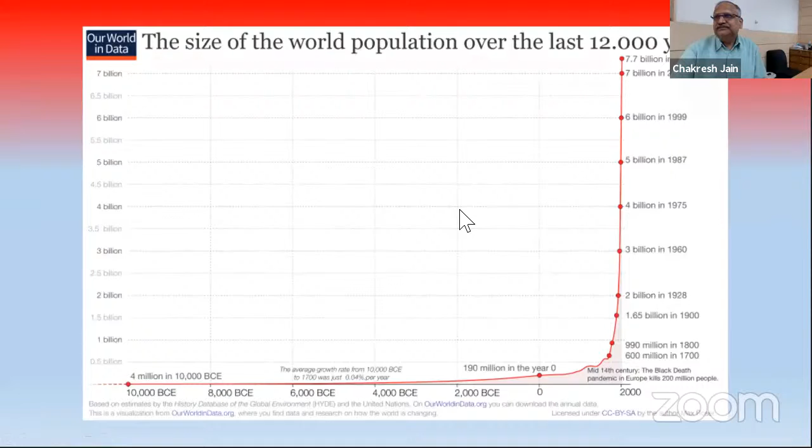Now, if we get a little closer, let's say the last 50 years, India and China are the two most populous countries. In the last 50 years, we have more than doubled our population. So as a country, our population has been growing very fast.

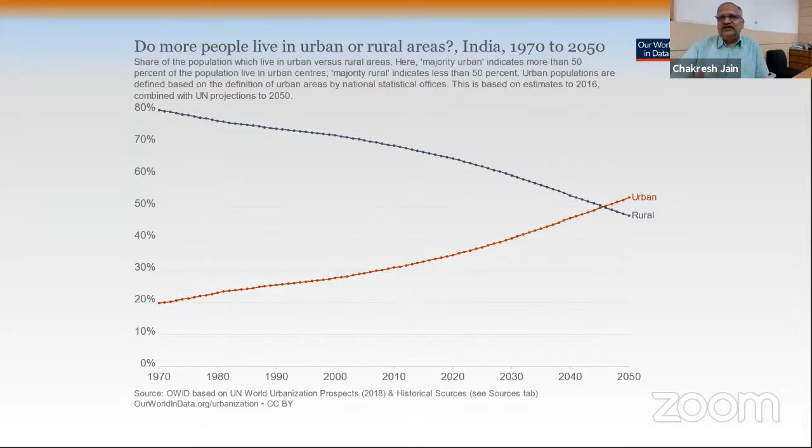But not only that, another big problem we're seeing is the urban population. In the last 50 years, the entire population growth is not happening uniformly across the country, but is moving to urban areas. What does that mean? It means we need to provide a roof over each and every head.

These numbers may not mean much to us, but if you start translating that into the construction industry, today we are supposed to construct almost 800 housing buildings - I'm not talking about units, 800 housing buildings per day. That's the kind of pressure we have today.

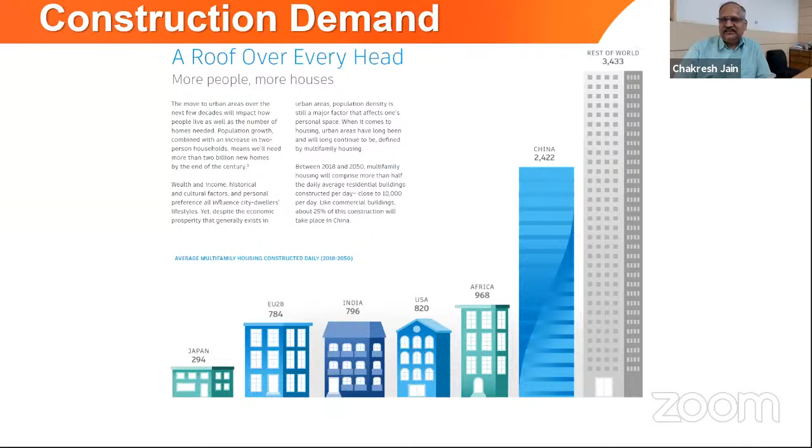On one hand, we have a growing population where we need to provide accommodation for them. But on the other hand, we need to have a very sustainable earth for ourselves. This throws a lot of challenges to us. The first challenge, which is well-known, is that in the last 50-60 years, the productivity in our construction industry hasn't gone up. So that's one big challenge.

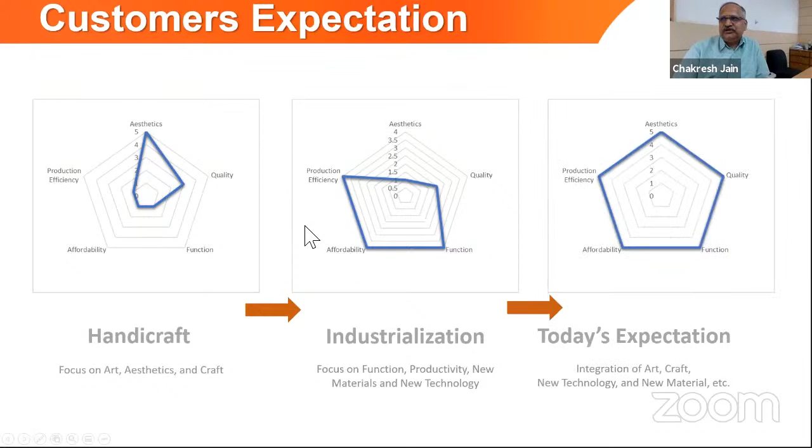The second challenge is today our customers also expect the best of everything. Before the industrial revolution, we used to have very good aesthetics and design. With industrialization, we could also produce things which were very functional, affordable, and produce them en masse. But today our customers are expecting everything from us, and with both of these things put together is the current challenge we have.

I won't talk about the solution, but we have a panel of experts participating from across the country, some of the best people available in the country. So let's hear from them. I'll pass on my baton to them, so they can talk about how we can have a balance between sustainability and what is required to provide a roof over every head in our country. So over to you, Farhad.

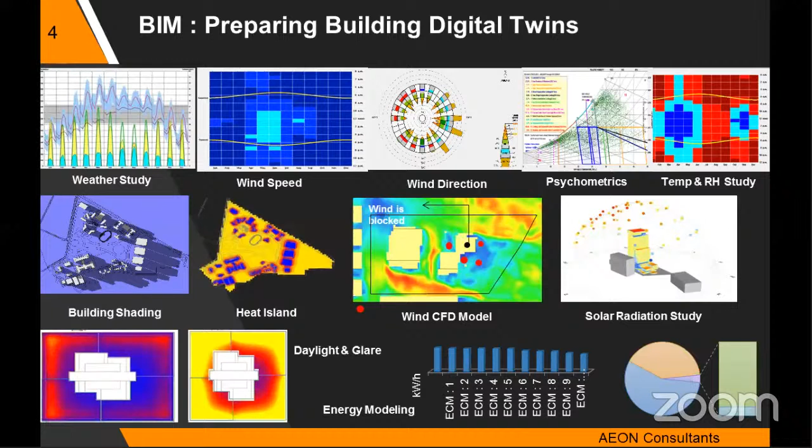It could be an existing building, it could be a new building, and that's where I look at it as one of the applications of building information modeling as it goes on. So I'm going to be talking about the aspects of it in building design today, how it is being deployed. And I'm going to present various case studies to you, short ones, since the time is only 20 minutes.

We got eminent panelists and speakers ahead, so I'm just going to show you small case studies. I normally give this presentation over 1 hour, so I have condensed it to cover the essence of it.

Now, we all know that the world is moving towards net zero emissions and net zero buildings. This is the future. Whether we achieve that in 2030 or 2035, it's a matter of time. But the building codes across the world, including in India, are moving towards net zero performance, be it net zero energy, net zero water, net zero waste, or net zero carbon. So it's a shift which has started taking place.

And as we are moving towards that, it is important that we optimize the building design before we deploy the renewables. It would be completely an incorrect way to go, where we look at a conventional building and use the brute power of renewables to make it a net zero energy building. That will just be the wrong way to go. And that's where the importance of taking care of passive elements of building design, active measures, integrating the two, comes into the picture.

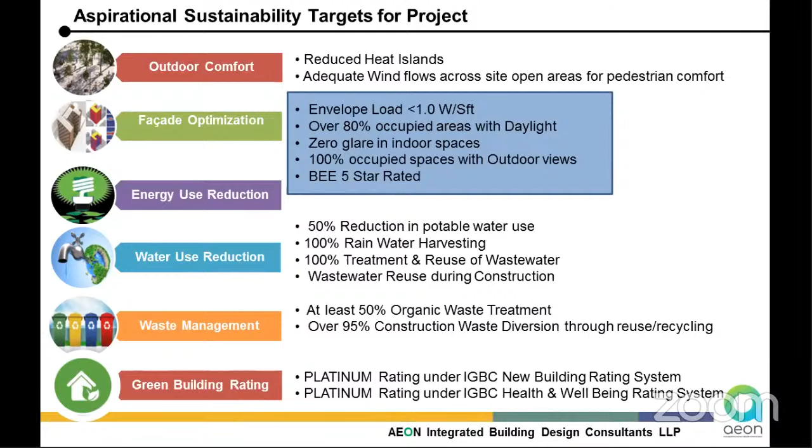Now, how do you quantify such a thing? They of course wanted 100% daylit space, as far as possible, more than 80% daylit. They said zero glare, and it is only the envelope performance that they're talking of. And this is where the tools that are available to us, to the engineers, to the designers, become important.

Like a simple case, we had these 3 buildings on this project where the glare component was very high. Two of the buildings, we had the glare still under control, but in building C, as you see there, the glare component was very, very high. Now, how do you take care of it?

Obviously, we have been talking about putting shading devices, various glass selections, and all that is possible to be done before you physically construct the building. I'm going to show you more examples in these areas where these tools are being deployed at this point of time. Now, here we are selecting the right glass typology.

It could be a darker glass, a low VLT glass, to a medium VLT glass, to a high VLT glass. How does the glare coming inside vary? How does the daylight performance change? What is it that we are looking for in terms of performance? All that is something which can easily be determined.

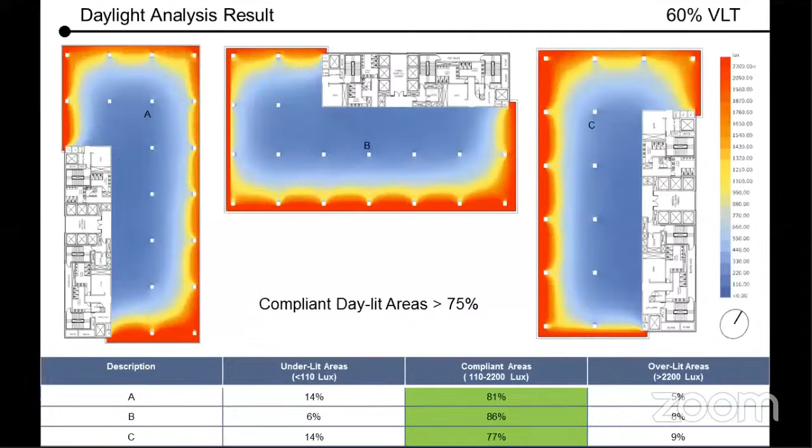Going forward, there's a double skin facade being talked about. There's something called parametric modeling, which is now being practiced and adopted in India, using shading devices, active shading devices, passive shading devices on the building facade. Using these tools, one is able to find out the right kind of shading device which balances between the daylight, glare, and also the energy.

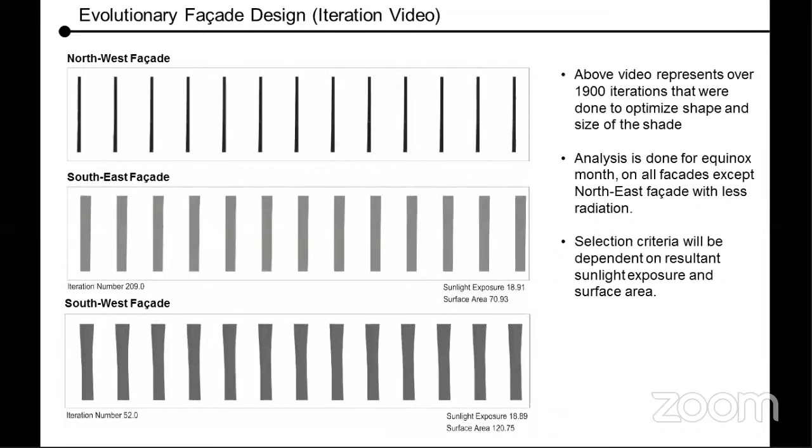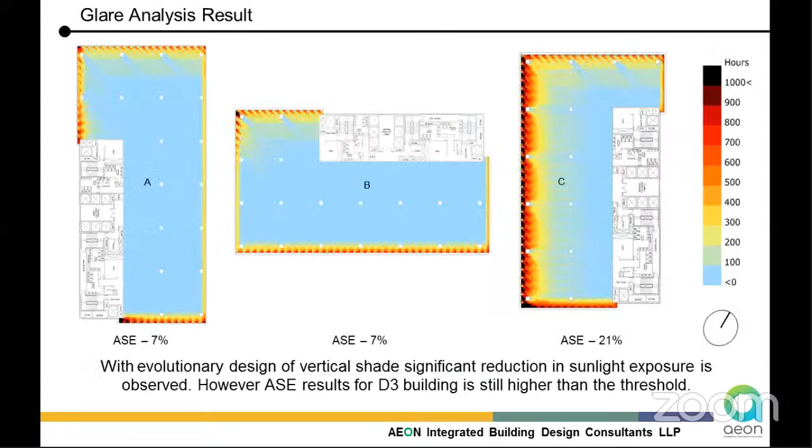A lot of time I come across questions that when you've got too much daylight coming in, are you not looking at the energy consumption also going up? So there is a trade-off that we have to do, and these tools help us do the right trade-off in the building design. You can see here the kind of results one is able to get from there, the exact results, and we are able to get the glare and daylighting under control, and then get into the energy performance.

Since in this case there was a very specific requirement that the heat gain from the envelope should be less than 1 watt per square foot, which is typically about 25% of what a conventional building is all about.

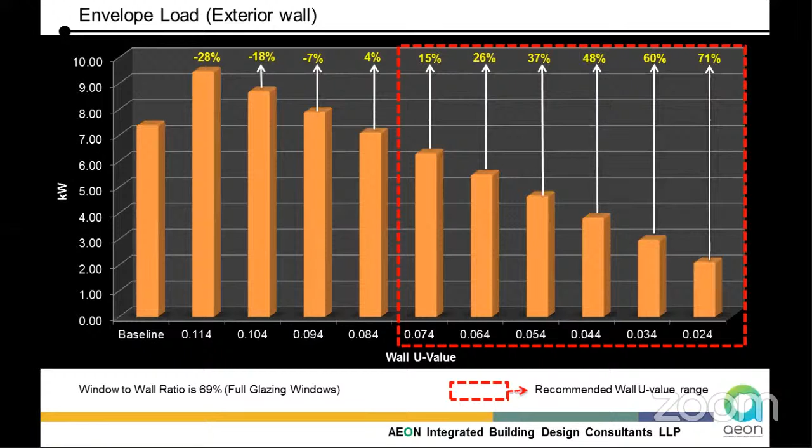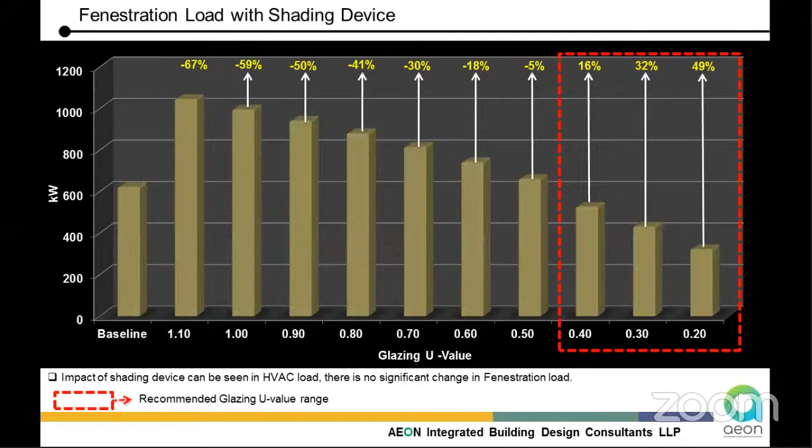Using tools, if you increase the thermal insulation on the wall, how does the energy performance come down? How does the energy consumption come down? Looking at the insulation on the roof, finding the right insulation thickness on the facade and roof area, looking at the fenestration U value, that means the glass U value, and looking at the shading devices' performance. All of that could be studied.

This is how the various 10 options were worked out for the same facade design, and whichever made more sense at the end of the day economically, as well as meeting the performance parameters, got picked up.

There's another great example that we worked on, a basement. Here the client was very specific that they wanted a daylit basement, and said if you could make it so we require lesser ventilation fans, mechanical fans to be used. Today we make millions of square feet of basements. We require megawatts of power in order to run the ventilation fans.

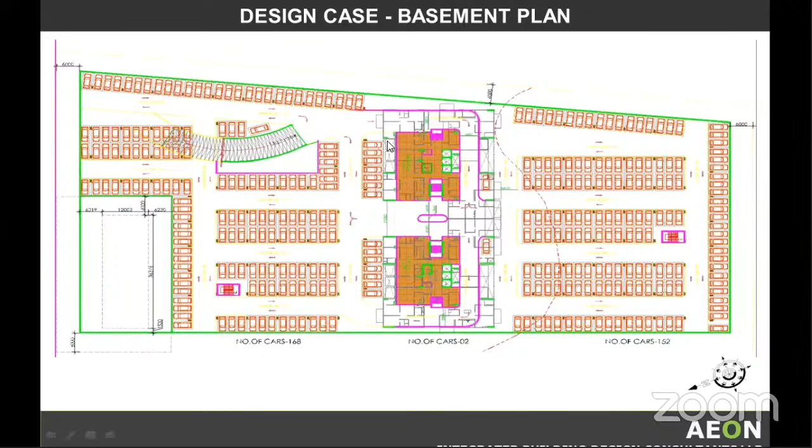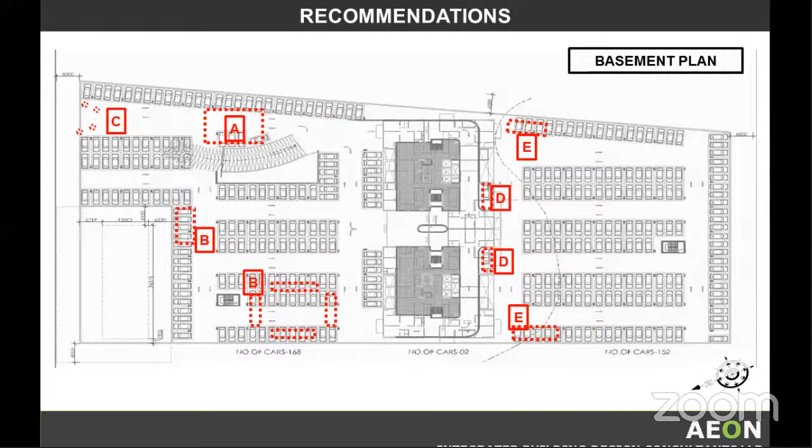In this case, a very simple example of creating 4 large cutouts around the building gave us about 50% daylit basement. Suddenly, looking at the CFD model of the same basement design, we found there were natural ventilation traces starting to come in. Optimizing that design further, using the tools, working closely with the architect and designer could get us to about 85% daylit basement, making it practically artificial light free in the daytime.

And look at it, we could avoid mechanical ventilation altogether because we had very strong natural wind flows happening, which were meeting the National Building Code criteria of natural ventilation and effective natural ventilation. Today, wind is being talked about as a

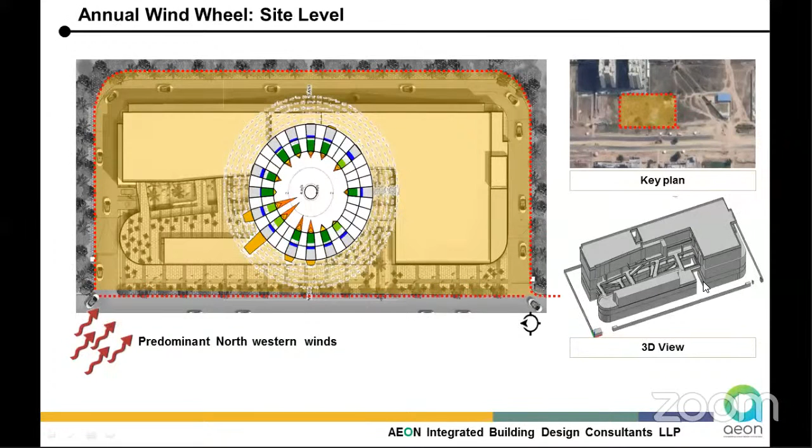thermal comfort tool. We have projects coming up which are high street projects where they talk about, especially the retail application, outdoor thermal comfort. Now, this is a retail project that you see out there. With everything, only the shops are air conditioned and all the common areas are open to sky.

If you see here, an active CFD model of this will show you the studies being done on this project, looking at how the wind is flowing through. Now, mind it, all the areas in between here, the common areas as you see here, need to be well ventilated to get thermal comfort out there.

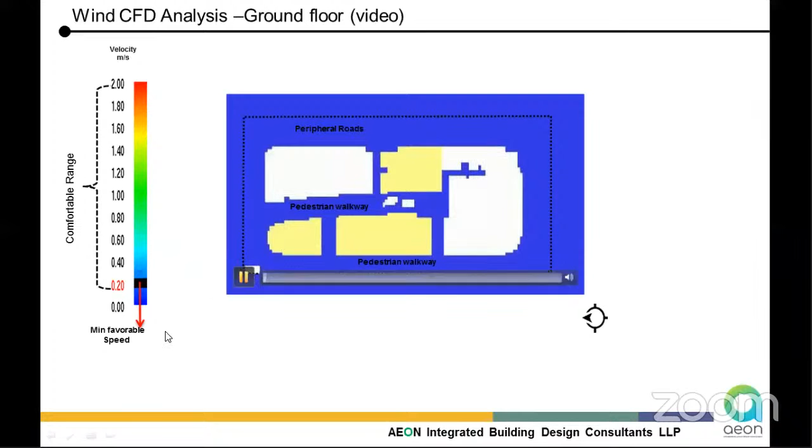But if you look at the wind model, it is completely avoiding flowing in between this common area or the atrium area, and is likely to cause a lot of discomfort. Improving that using the simulation tools and coming up with various suggestions, you can see in the end how it was resolved to make sure the wind is flowing correctly. You can see how the wind is passing through, and then introducing water bodies, working closely with the landscape consultant. That's how you see the integration of various disciplines and streams coming together.

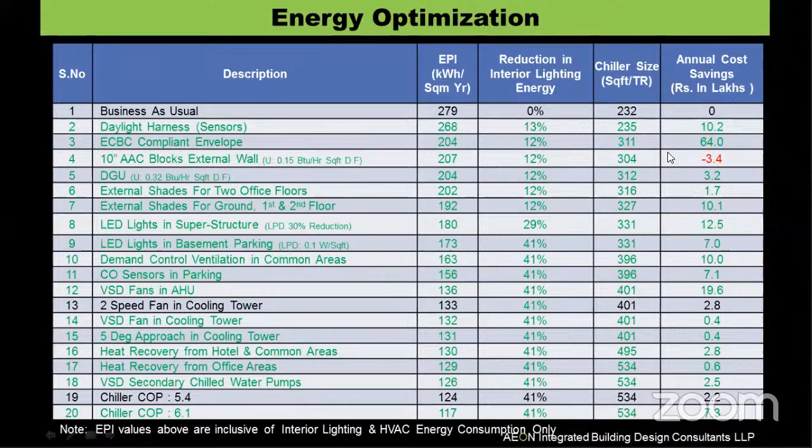Today, this tool is being actively used for energy optimization also. This is a classic example of a building which was very well designed to start with. We had an air conditioning load of about 230 square feet per ton. It was like a hotel menu card - when you go to a restaurant there's a 20-item menu card, which was presented to the client, showing step by step how we could take the same building from 232 square feet per ton performance to 534 square feet of area per ton of air conditioning. The air conditioning load became less than half. The client also had the advantage of seeing the capital cost spend against each item, and the reduction in annual energy coming out of it. They could make an informed decision on which strategy suits them best. And looking at even the lighting optimization.

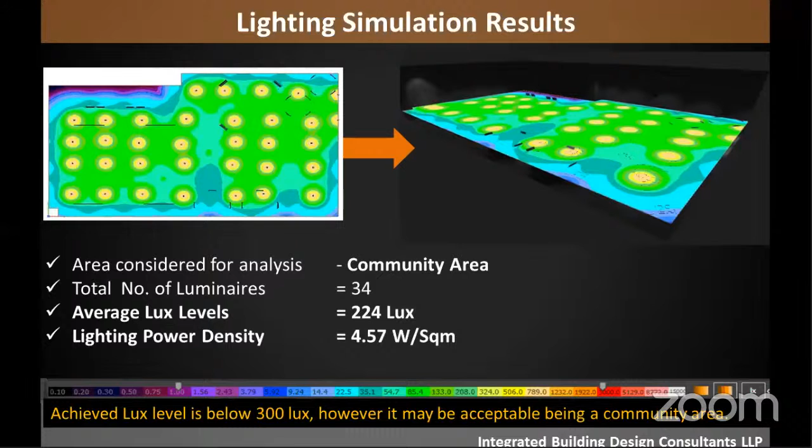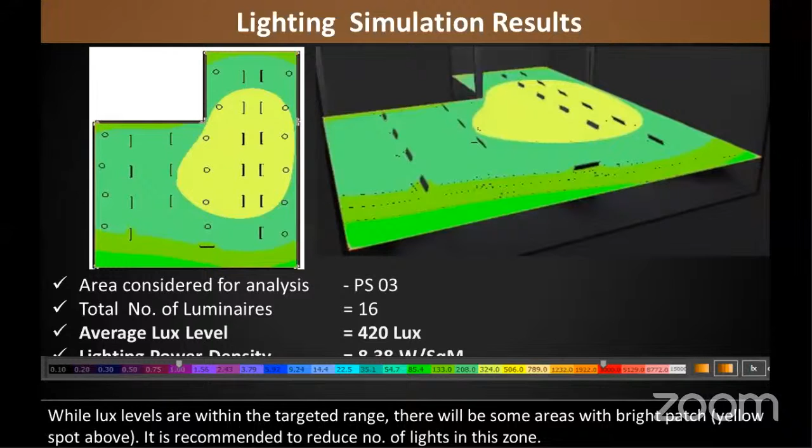Today we have a lot of interior offices that we work on - high-end interiors, good lighting solutions. Using these tools to finalize and look at the kind of lighting pattern that is going to form. Like what you see here, one of the common areas, the interior designer had used these suspended lights, and this is the pattern they are forming. Now, is it right or wrong? It's something an interior designer can look at and determine - is this the design intent? Looking at the watt per square meter being consumed in terms of lighting energy, you could determine it. In one of the cabins, you can see the performance - a big patch is being formed, which is not only leading to energy wastage but is also going to cause discomfort to the occupant inside. So this is something you are able to determine.

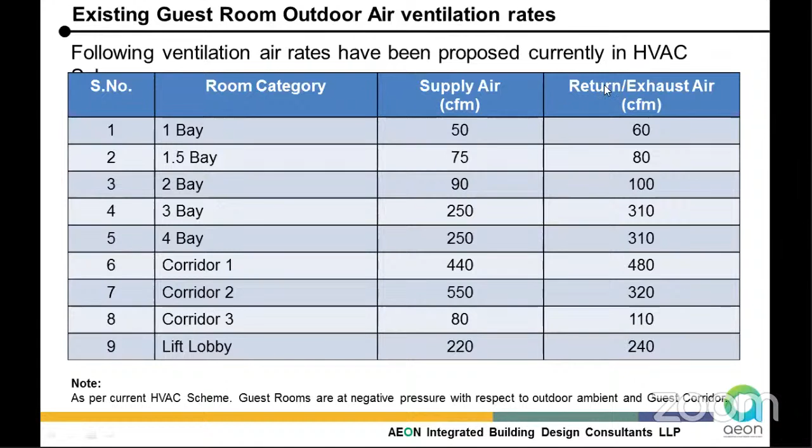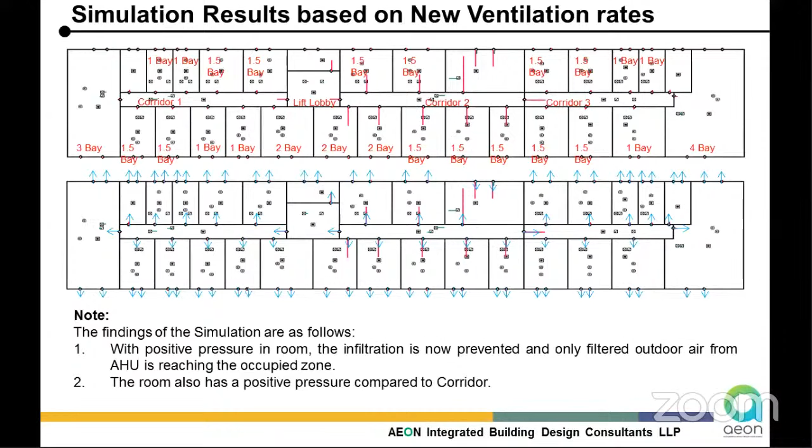One of the great areas we worked on was indoor air quality improvement using the same digital twin process. This is a hotel design - actually a 5-star hotel in Delhi - where we had treated fresh air being supplied to the room and some exhaust going out from the toilet. The exhaust air quantity was larger than the treated fresh air supply. Normally, that is a design acceptable to everyone. But in this case, we were talking of IAQ where PM 2.5 particulate matter was a criteria. Because of the negative pressure created in the room by doing more exhaust than supply, we had movement of particles coming from the building facade, because a building facade cannot be completely airtight. By adjusting the pressure balances through air balancing, one could ensure the rooms are under positive pressure without allowing PM 2.5 or larger particulate matter to move inside, ultimately getting the result we were looking for. Today, this hotel proudly displays their air quality outside at the reception area.

Using a fire and life safety application, here you see a building where a fire has been generated. The requirement was that we had a mechanical fresh air fan throwing in makeup air, and an exhaust happening to the ceiling space. In case of emergency, when smoke is generated, we are able to extract the smoke out by a mechanical fan supply and a mechanical fan for exhaust. There's an energy concern with it, and a capital cost associated with it. So here we looked at two aspects: the mechanical fan which is operating, and a fire which took place - what kind of smoke buildup happens when we have a mechanical fan for supply and a mechanical fan for exhaust.

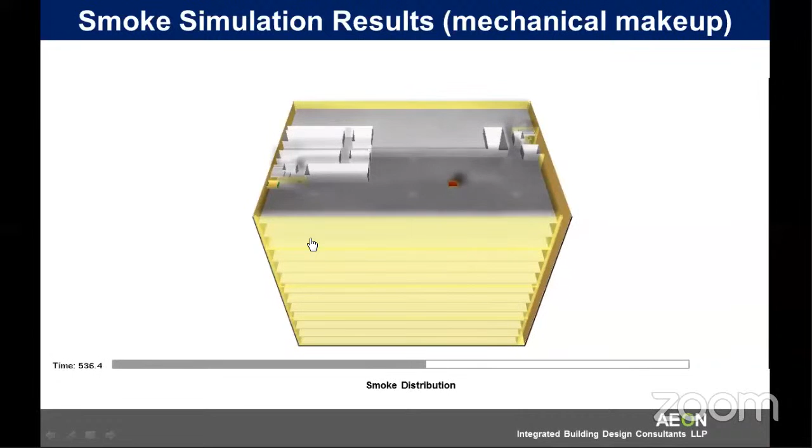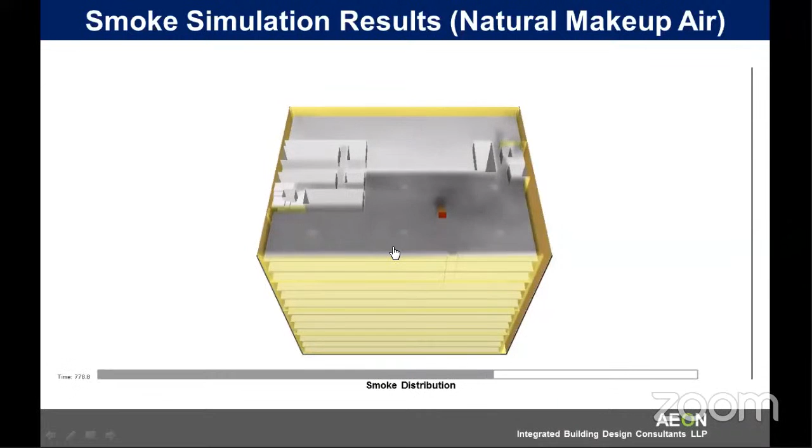In a second case scenario, we looked at openings on the facade, where every 10 meters there's a motorized window that gets actuated by the fire alarm system. It opens up, and there is no mechanical fresh air fan now, only a mechanical exhaust air fan. We found this to be better in performance, and also in capital cost, saving crores of rupees for the client, because this is a tall building requiring this application.

Now, how you deploy it, how you use it, it all matters. So I'm rushing through that. I'm also bringing in an existing project.

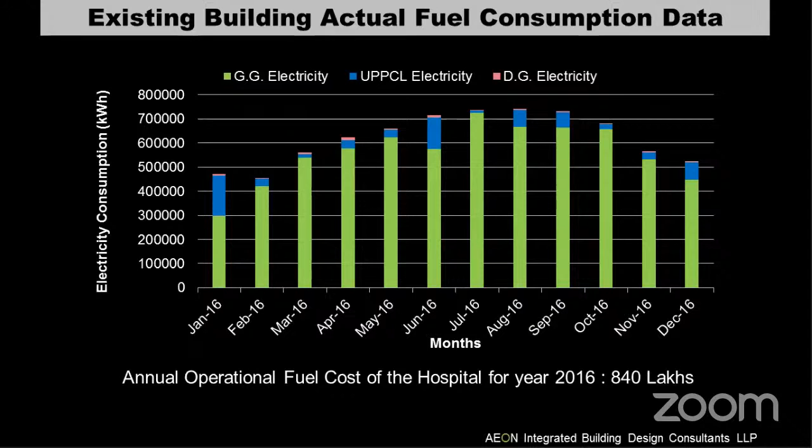This is a building, an existing project where the client's requirement was like what the green box shows. They asked, could you help us before we even take up the renovation, and tell us what strategy is going to work best? There's a method called calibrated energy model, in which you duplicate the performance of the existing building on the computer, and the simulated model behaves exactly the same manner as the actual energy consumption pattern. Once you achieve that, you are able to study various measures.

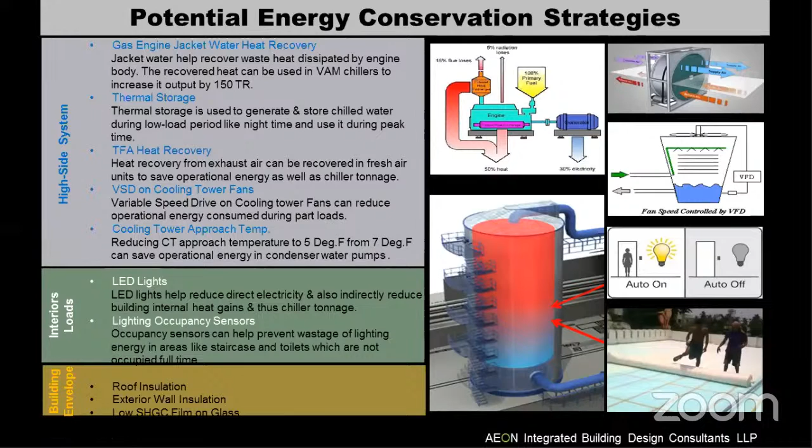In this case, we studied things like gas engine jacket water heat recovery and thermal storage. This is the engineer's delight, the blue box you see. The green box is the interior designer's delight, and the red or yellow box at the bottom shows the questions raised by the architects. Each of those questions could be answered where there is a reduction in the air conditioning load, reduction in energy consumption, and the capital cost increase—everything could be studied.

There was a potential here for bringing down the air conditioning load by 300 tons, saving about 3.5 crores in operation cost per year, and the capital cost could also be determined. So here it's a renovation project where the assessments and study are being done before it is made.

I'll bring you to the last study, which is a net zero energy building. It's a small building of about 45,000 square feet on only an 800 square meter piece of land, going 45 meters tall. The client was very clear they wanted a net zero energy building. Now, to make a tall, small net zero energy building, where we have very little area to put solar panels on the roof, is a challenge.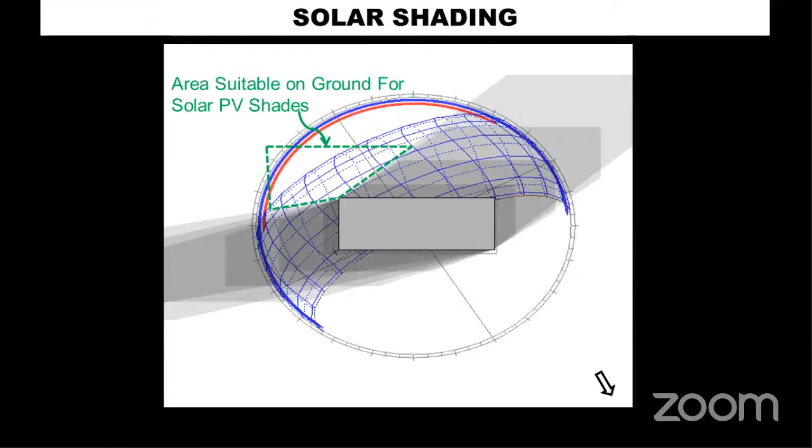So we started finding other places where we could put the solar panels on the ground. You can see here the shadow range cast by the building around the year, and a small green trapezoidal area where there's no shadow being cast, being put up for a car park. That's the place on top of which you put the solar panels.

Studying the solar radiation on the facade, we decided we are going to wrap the building around with solar panels. These are black solar panels, and easier said than done—the aesthetics, daylighting, how that gets balanced out, and the energy, was the main challenge of the project.

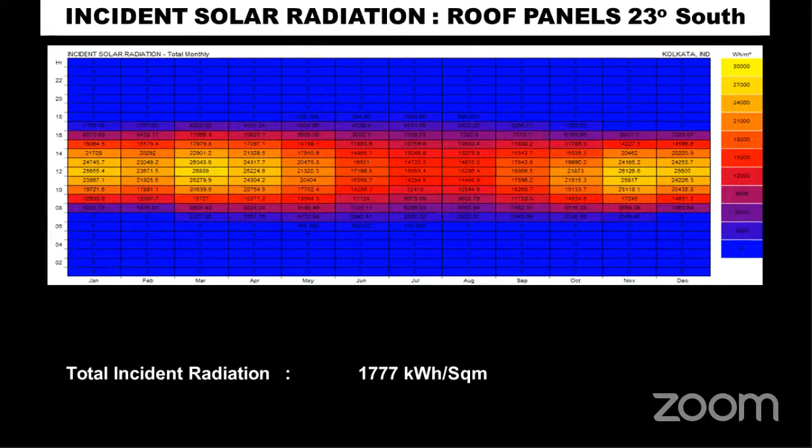So this is how we studied the solar radiation coming on the facade year round on all four facades as well as the roof, looking at the solar exposure, the number of hours or days the solar incidence is happening, and then going on to the daylighting.

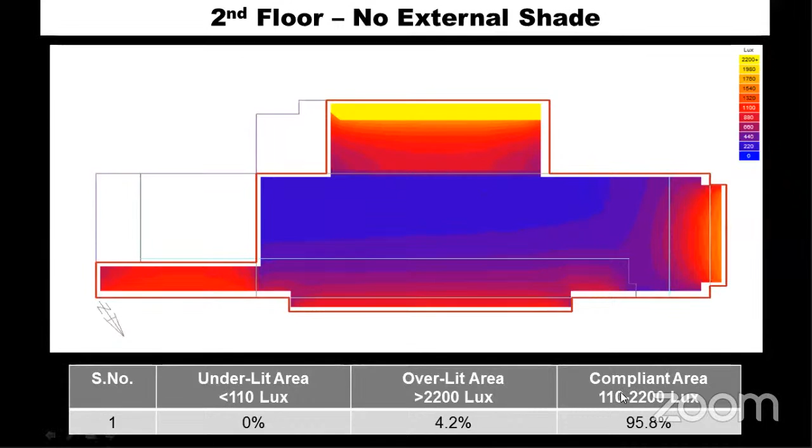If we do not have any solar panels on the facade, the building is about 96% daylit. The moment we put our solar panels, which you see here put in a sawtooth manner, we had this improvement happening. We kept on doing that—I'm not getting into the details, but it gives you an idea of what has been done there.

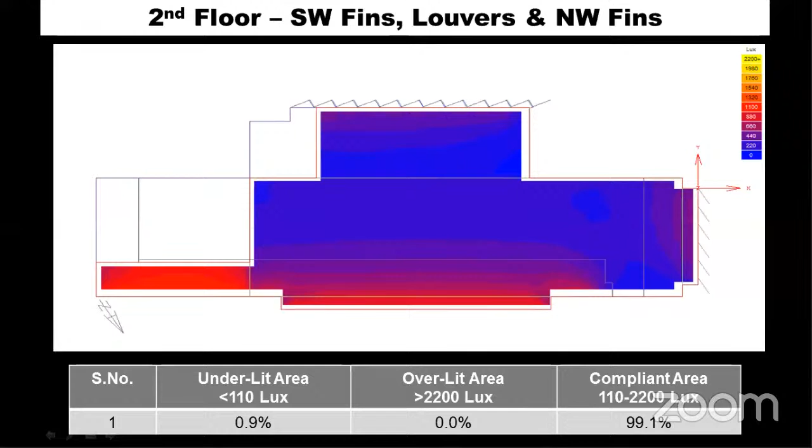Ultimately, at the end of the day, when all of the glare and daylighting was balanced out with the energy, we had 99% of the floor plate daylit. We determined various options for putting the solar panels at an angle, the width of the panels, the angle of the panels, how they would look aesthetically, how they would look in terms of daylighting, how they would perform in terms of glare, and how they would perform in terms of energy.

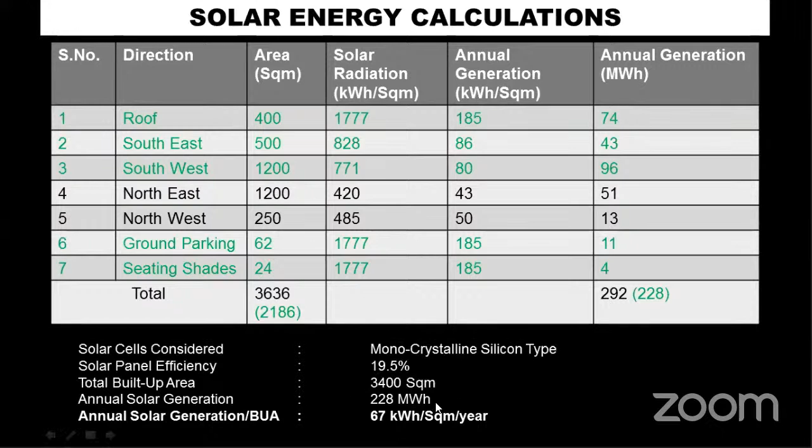Balancing all four aspects, we found out that we could generate close to 228 megawatt hours, which worked out to an energy performance index of 67 kilowatt hours per square meter per year. Now, engineering is reverse design, where we reverse design so that our consumption in the building matches what the production is.

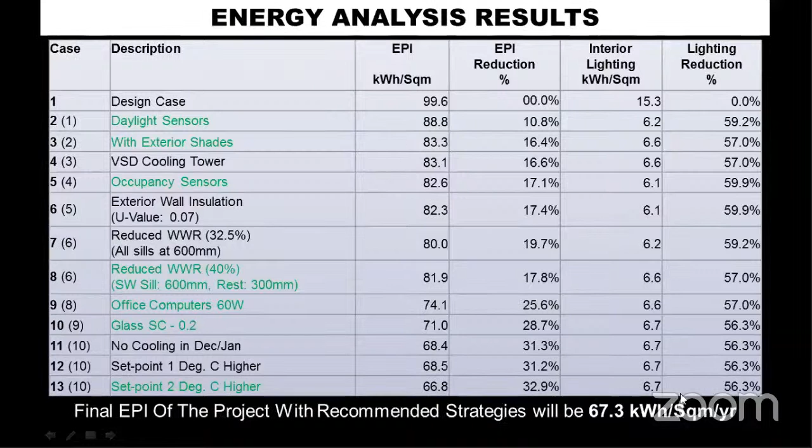Ending my presentation, since it's only 20 minutes, I want to showcase my own office to you. Normally, a green office is always associated with some rich corporate, big companies that do their offices as green offices. But we, as a small company, as consulting engineers, with a small 10,000 square feet office, decided to go for a green rating on this.

Obviously, capital cost was a concern, and the whole digital twinning process helped us in a big way. Today, this office is a 100% daylit office. We don't switch on an artificial light even in our toilet or pantry area, forget about the workspace alone. It has got a platinum rating from IGBC on the green scale, and a second platinum rating on a health and well-being scale.

This is another rating system, and probably the only building and only private office like this which has a double platinum rating. I can proudly say that all of this came to us—I would like to say that I saved capital costs rather than spending extra costs. The digital twinning process was an important aspect for it.

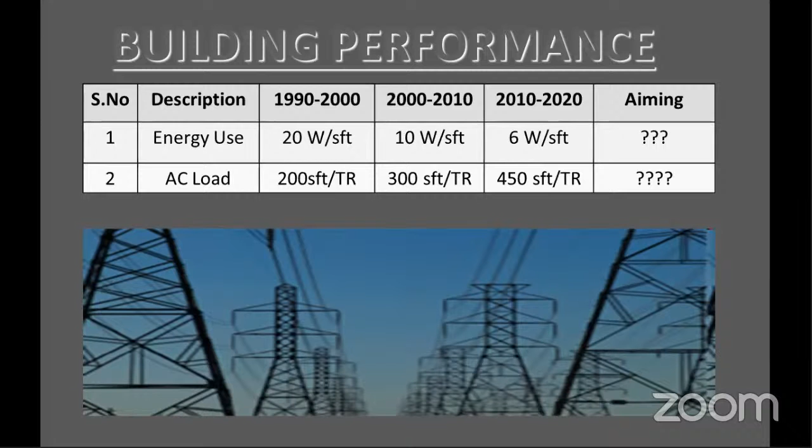That's where using these digital twins would make a lot of sense. Future, as I predict, is a net zero resource living. This is my take for our power lines running across various cities of India—we can put them to better use because we will be a net zero resource. Thank you so much for your time, and I hope I was able to keep to my 20 minutes only. Thank you.

Thank you, Ashish sir, for the insight into these great green projects. I certainly feel that we need to start conserving energy and design green buildings so that it's sustainable not only for us but for our future generations as well.

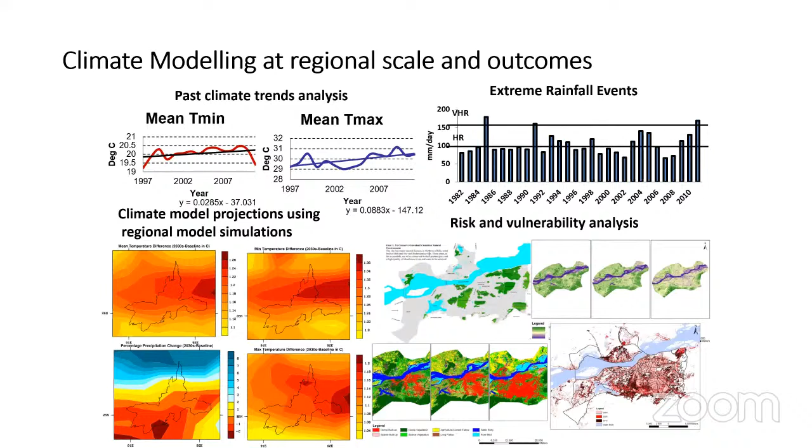For example, this model can inform us about the future of agriculture and changing temperature, which will impact crop yields, physiology, and growth cycle. The farm system will face soil erosion in future due to flooding, which will impact use of pesticides, fertilizers, etc. There is also a much larger impact on people, incomes, livelihoods, migration, and displacement.

We have seen all of this grappling us in recent times, so we need to be better prepared for the future. Overall it will impact the food system. But if we do predictive planning and visualization, we can take action now to avoid these impacts later - for example, differential cropping systems in different seasons, actions to prevent soil erosion, and overarching policies for migrants and displaced populations. So there are tremendous impacts of tools, techniques, and visualization.

Now let's move to a little smaller scale. Japan is very technology-savvy and able to use different predictive tools to battle disasters. We know of the Great East Japan tsunami that happened a few years back, and the nuclear disaster. That helped the country bounce back and resort to smart solutions, visualization techniques, and predictive analysis for disaster management. They are much better able to predict earthquakes with early warning, helping them be better prepared.

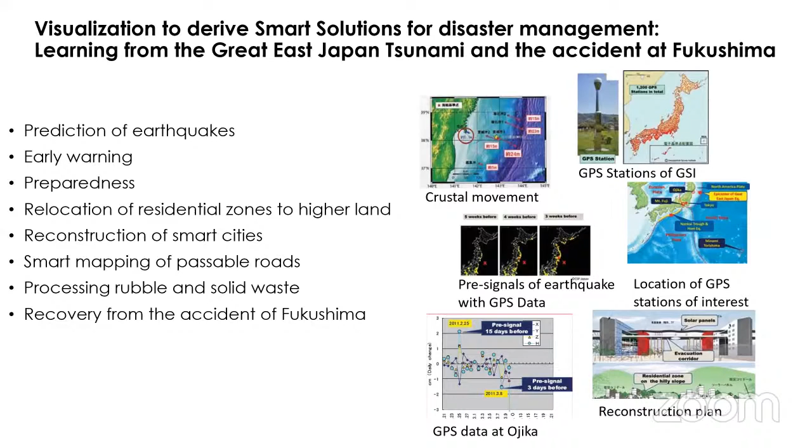Elements were designed as the planning team carried out air temperature, wind velocity, and thermal comfort modeling. The outcomes helped them plan for additional greenery at street levels, as well as incorporate urban design elements such as sky gardens, roof gardens, staggering of building geometry, and modulation of building heights.

All these measures helped the development achieve desirable higher wind speeds at and around the staggered levels, improved thermal comfort due to better wind velocity, and reduced air temperature. This also has an impact on energy consumption and overall thermal comfort in the development.

Now moving on to the building and campus level, which many of us are more comfortable with. We know that architects and designers, particularly those practicing sustainable design, adopt an integrative design process - as Ashish highlighted many times in his talk - and are able to do value engineering using different tools and techniques to achieve a design that is green and sustainable. This offers the best value for money, because cost effectiveness is crucial. The earlier you start value engineering, the better.

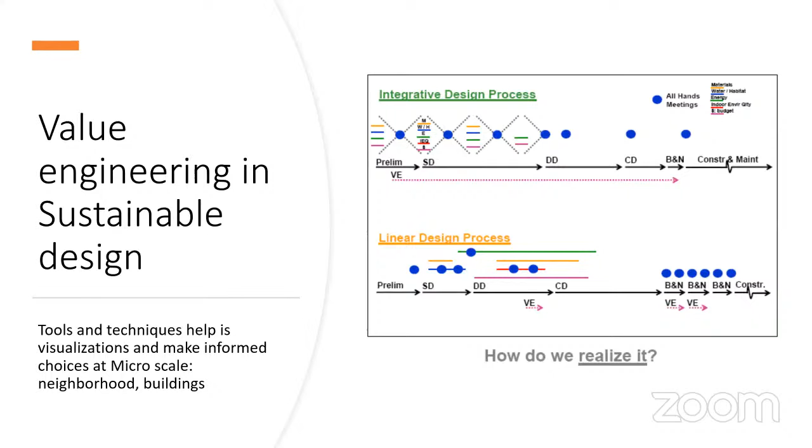Typically in an integrative design process, value engineering and use of tools such as building information modeling begins very early in the design stage. This gives maximum benefit. However, if you choose a linear design process, you would lose out on the value engineering opportunity you would otherwise have gained.

So when we talk about the integrative design process, what is the concept? We have a client for whom we build, a builder who constructs, and a multidisciplinary design team that contributes to the design, each with an input. Sometimes these inputs may clash. For example, as an architect, there's a notion that more glass area makes a building look better, but that may impact energy consumption and MEP design. So you have to have a balance.

I've talked about a specific case study where an architect and landscape architect came together to make informed choices. This is a case study for a housing complex at a neighborhood scale for a corporate campus in Andhra Pradesh. The design team had to deliver an efficient design and moderate the air temperature within the campus to offer a better microclimate.

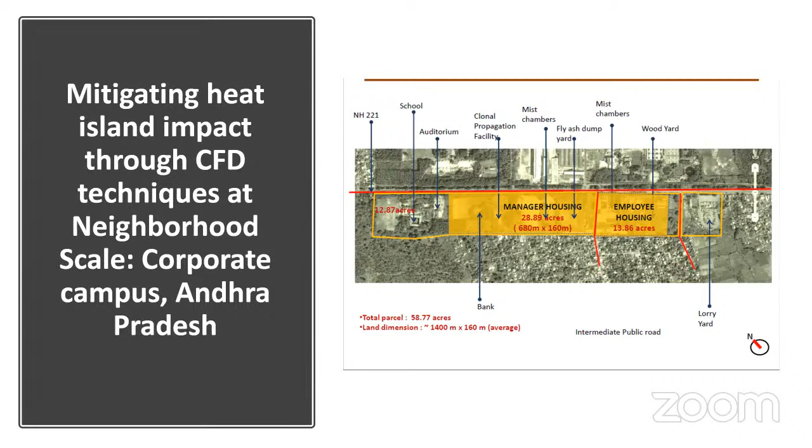A detailed urban heat island study using computational fluid dynamics was carried out. Ashish spoke about CFD several times in his earlier presentation. The base case comprised hard paving and asphalt roads, and the CFD analysis showed that at about 1.2 meter level, on a typical day during March, the average late afternoon temperature on the campus would be 39 degrees Celsius. Even during early morning at 4 o'clock, it would not go below 31.5. So there was a lot of heat getting trapped.

Obviously, with this kind of outdoor design, the design team cannot achieve the objective of a better microclimate. So the architect and the landscape designer got together to design appropriate landscape vegetation, and were able to reduce the average temperature and the early morning temperature substantially by about 3 to 4 degrees Celsius.

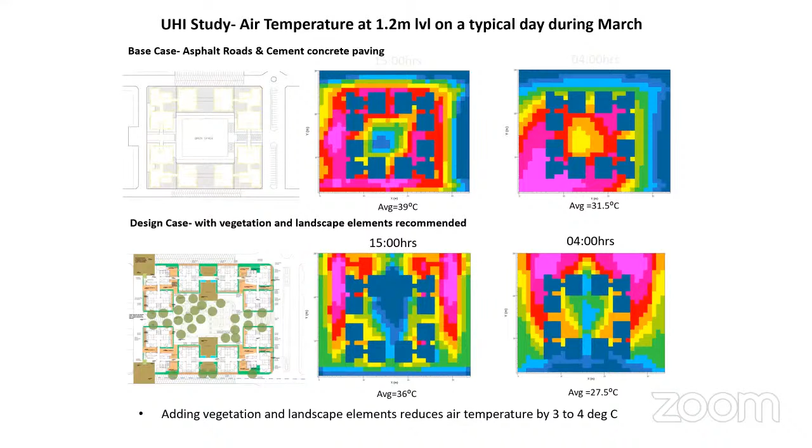Subsequently, the architect wanted to take advantage of that reduced microclimate temperature and facilitate natural ventilation in the houses. Further analysis was done to map the wind speeds at different heights of the building, and the architect then used the results of that output to design things like intermediate courts, bridges, etc., taking advantage of natural ventilation. As soon as you switch buildings to natural ventilation, you can reduce air conditioning load and consequent energy consumption.

Now we spoke about different elements of the design. Finally, the building has to perform, which is a culmination of multiple design inputs: electrical design, lighting design, water system design, HVAC design, architectural design, and control. Everything has to function as a unified whole and give the best performance to the client.

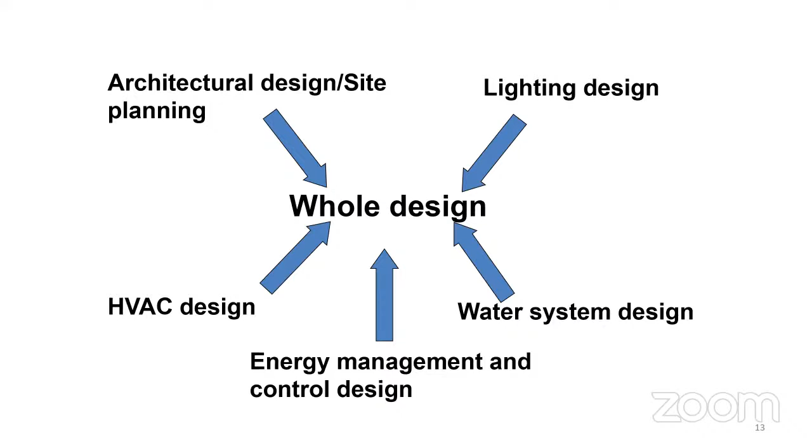These parameters are fixed, and you have to lower the energy consumption and improve the energy performance of the building through better lighting design, integration of daylighting, building envelope, and better air conditioning design with controls. Once you have an optimized design, you feed in renewable energy systems and try to move towards a net zero energy building. That's the whole concept of how this works.

We use different tools and techniques and visualizations to make it happen. It is not the task of only the architect or only the MEP designer; everybody has to do their part. The sustainability design consultant finally aggregates all of this to produce the end result, which is better energy performance.

So what happens in this exercise, and the earlier we start the process, the better it is for the project. At an early stage, we can restrict to things like simple box-based analysis and visualization to make macro decisions related to building geometry, massing, orientation, and window to wall area ratio. I want to tell you, do not switch to things like CFD etc. in the beginning. They are good tools, but they require a lot of expertise to operate. It can simply be garbage in, garbage out if you do not know how to operate them properly. There are experts available, and I think Capricorn also has BIM solutions to help designers in these aspects in a better way.

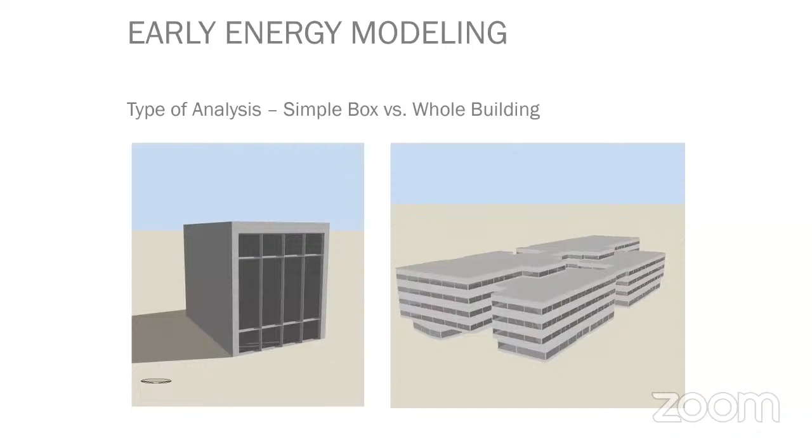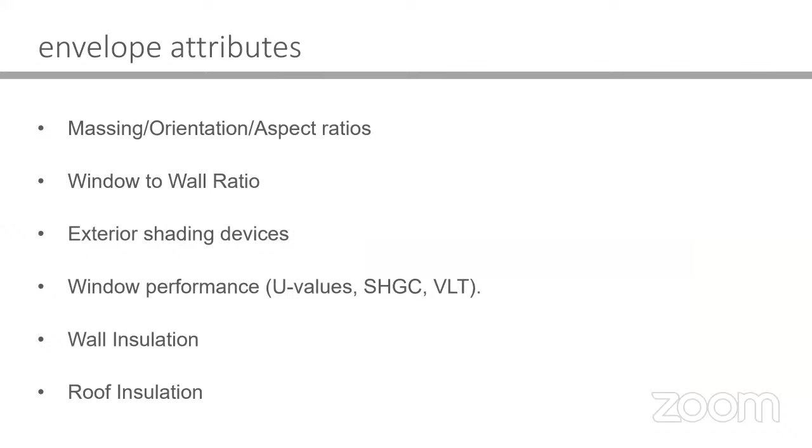After that, you can further do micro analysis to see from which part of the facade the heat is coming in, and then you optimize that. This also can end up in you choosing the right kind of insulation as well as the glazing typology.

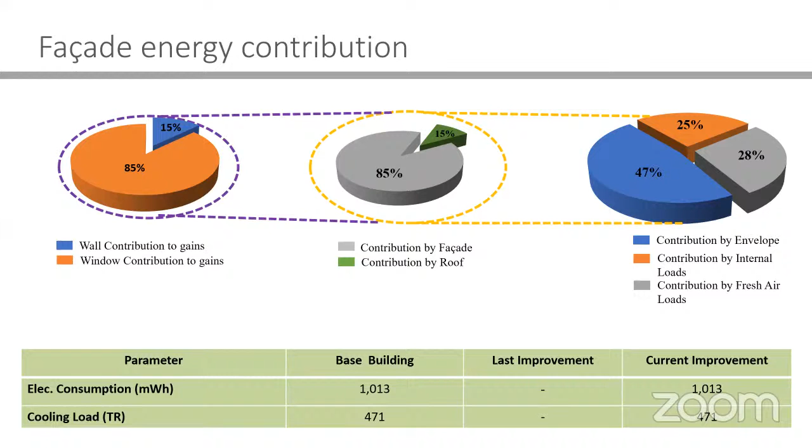We can also carry out an exercise for optimizing orientation. For the same form, we can see if your site offers an option, how you can rotate your building, and which orientation gives you the best results in terms of least energy consumption and least cooling load in a hot climate. So these tools and techniques help you.

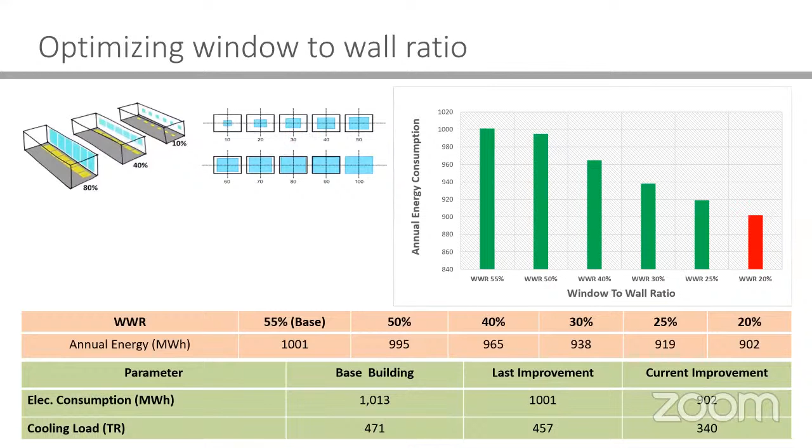Similarly, you can do optimization of window to wall area ratio. However, in this case, it is obvious that if you have a lower glass area, you will have a lower cooling load. So the decision on window to wall area ratio is dependent on another very critical variable, which is daylighting. Window to wall area ratio and choice of high performance glass is decided based on daylighting, energy consumption, and overall cooling load, and of course cost effectiveness.

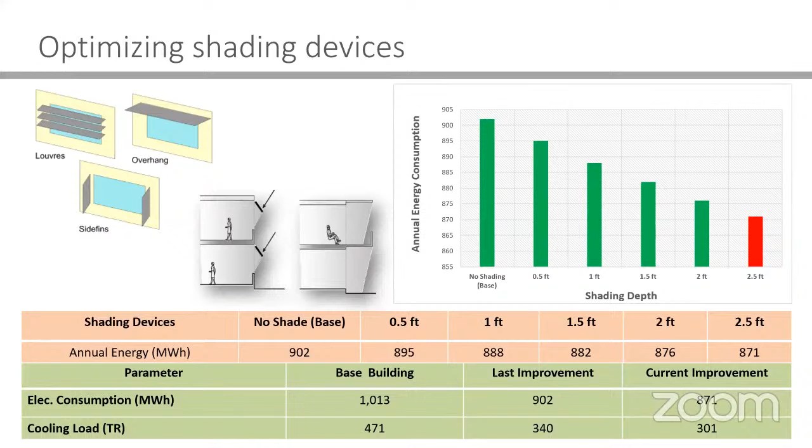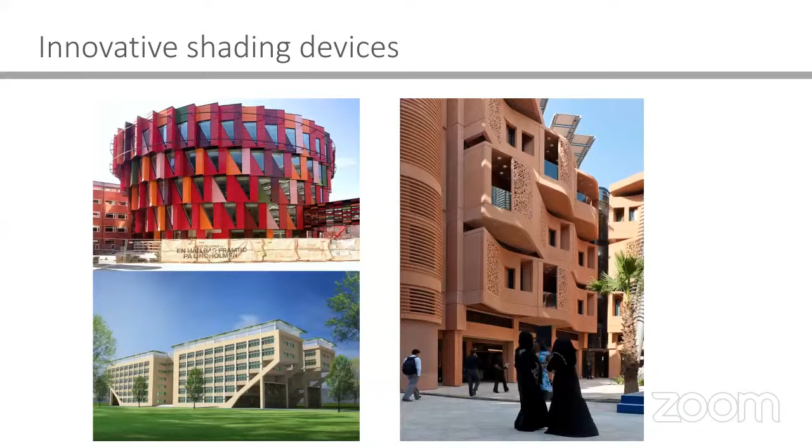I can go on, but I have to restrict since it's a restricted time. We can do shading device optimization with an end goal of providing maximum shading for better thermal comfort, but also maximize daylighting. These are some examples of great architecture where these tools have been used for optimizing shading. On the right-hand side is the mist building of Masdar City, a famous building by Norman Foster, designed in a hot climate to protect the spaces from harsh sun.

Now coming to the other important aspects of lighting design. What has happened is that lighting design has evolved over the years, and optimization techniques have changed, and hence we need to use the tools and techniques in a much more advanced way now. You have different kinds of lighting software that can be used to design multiple schemes, and we can take action based on efficiency, aesthetic value, and cost.

While doing so, daylight modeling and study of daylight availability for reducing energy consumption is done to achieve a better and efficient design. It is also possible to visualize daylight availability in spaces and integrate daylighting with artificial lighting through control strategies.

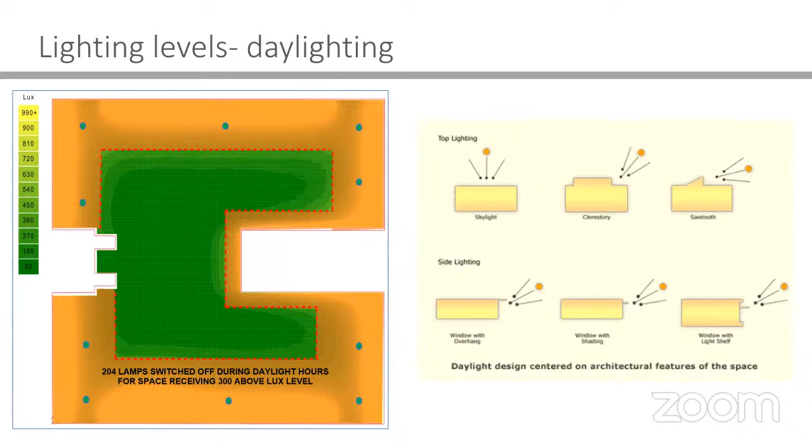I'm skipping the things that we can do with HVAC modeling, because that's another area of optimization. But finally, as I mentioned, you do it in parts and then you have to synthesize.

So finally, when you carry out the whole building modeling and derive benefits from optimization carried out in envelope, lighting, HVAC system, the end result gives you a high-performing building. You can actually see the journey from where you started and where you ended, and the kind of savings these tools and techniques have given you, and the visualization you have achieved. So it's a very integrated process, and it is time consuming, but at the end, the result is very fulfilling.

Now, we are talking about design all the time, but as architects, we design and then we don't really go back and check whether the building is performing. So it's equally important to visualize the performance, whether what you designed through simulation and CFD is actually working the way you intended. Visualizing performance and ensuring continuity and improvement is something we promote a lot these days, and LEED has a tool to do it.

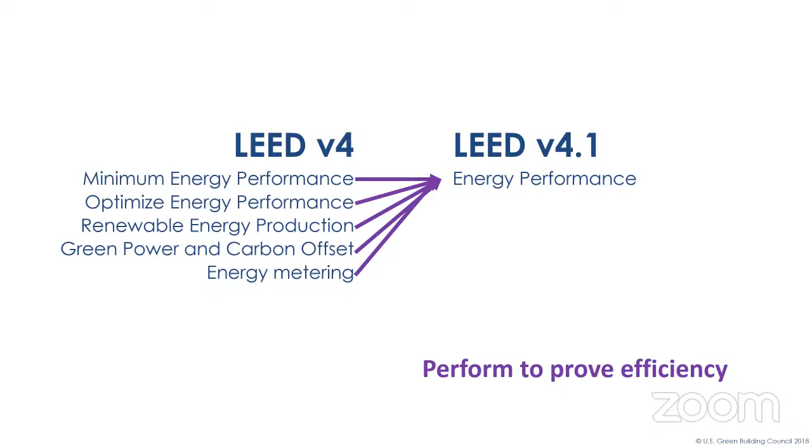In LEED's new rating system for operation and maintenance that applies to existing projects, we have created a cloud-based platform that helps you culminate all your design parameters and quantify them through energy performance monitoring and recording. This platform is called ARC. I won't get into all the details, but what you do is input your performance data on 5 parameters: energy, water, indoor environmental quality, transportation, and waste management. You're able to track data and see whether you're performing to the level you committed at design stage.

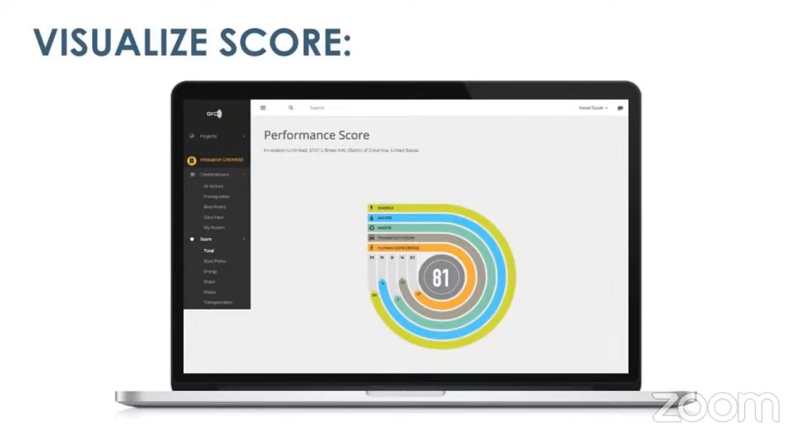And the tool gives you a performance score. This is dynamic—the better you perform, the score improves. It also gives you cues on things you need to change if the building is not maintained properly. So that is very, very crucial.

For example, in our office in Noida, we have a performance dashboard and we also measure indoor air quality. On the top screen, some days when perhaps the outdoor air quality is bad, we have a slight shift in indoor air quality—we're not getting the requisite quality. However, we go back and check whether our systems are operating properly, whether the filtration is correct. This helps us visualize performance and take actions, which is very, very critical.

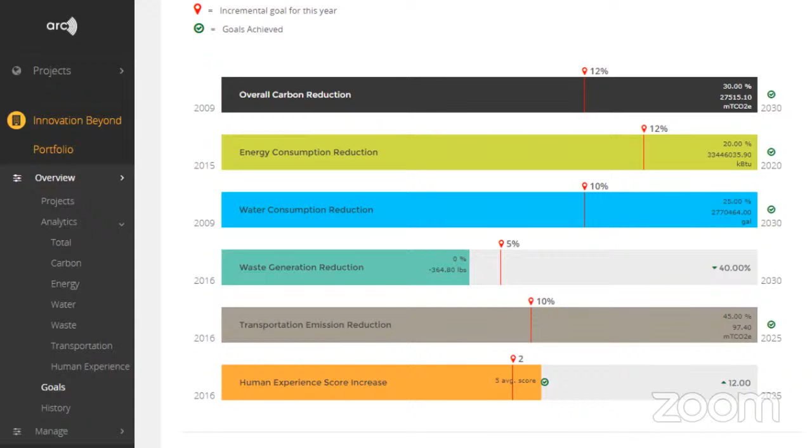This platform also helps you do analytics and, most importantly, set goals for future improvement. There's always a chance for improvement through tweaks, maintenance, and upgrades, and this tool can help you track that. For example, this Ascendus Pinnacle building was initially certified LEED Silver, and it moved its performance to Gold by making tweaks to its systems, lighting, air conditioning, etc. So it's a continuously improving design.

I just want to end by saying that when you visualize, then you materialize. All these tools and techniques are very good for you to visualize, and we all want to do that. When you materialize, you have to maintain what you have visualized throughout the lifetime of the building, because that's the enormous footprint it leaves behind. And you can do that. So I think it's a continuous journey, and we can make this happen with the help of modern tools and techniques. Thank you very much for your attention.

Thank you, Millie ma'am, for giving us such a broader outlook of visualization and sustainability. Being an urban designer myself, I can relate to city information modeling—at city level also our data needs to be integrated and coordinated for a sustainable city and nation. I really like your point that passive measures are the best. I really press that architects should have the tools at conceptual stage itself, because passive measures are very cheap and effective, with no maintenance required. So we have Autodesk Insight for that—the simulations you showed were really helpful, ma'am.

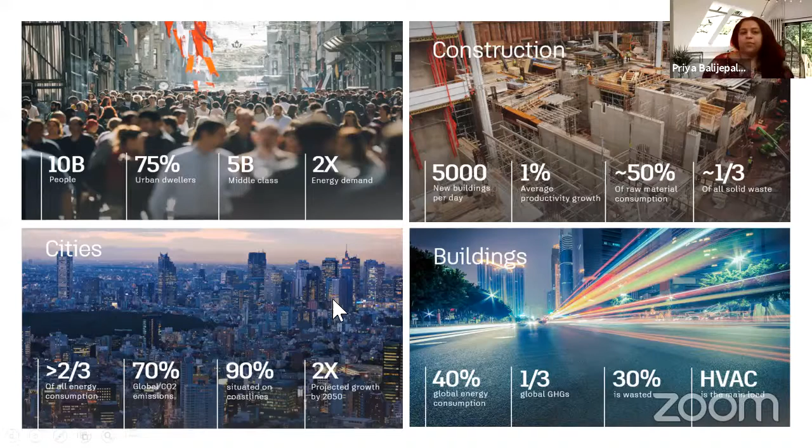Ma'am, you're on mute. Yeah, so this calls for the way we look at things. We at Autodesk are cognizant of the fact that there will be more demand for products, more demand for cities, more buildings and every supporting infrastructure. So more is inevitable, but also the fact that the natural resources that we would need to build this ecosystem for ourselves is depleting. It's also limited, so less is a reality.

But speaking from a design perspective, this is also an opportunity to do better. Better in terms of a better future for ourselves with less negative impact on our environment. This vision statement, or this idea for us, has come from the fact that probably all of us here agree that 80% of products' environmental impacts are determined during the design stage, as early as the drawing board stage. So the speakers prior to me did emphasize that the earlier you get to understand your design, the earlier you get to understand the environmental implications, the better it is in terms of not just your overall project performance, but also very importantly in terms of achieving your business goals, your project timelines, and overall ensuring your business outcomes and sustainability outcomes.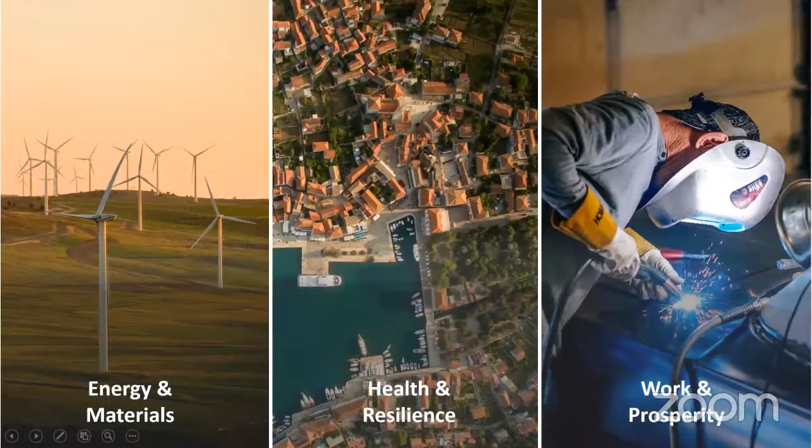With customers like Mills Group and many other customers globally, the work they do inspires us. Their ambitions, the way they are embarking upon their sustainable journeys inspires us. And today, our vision and mission is to enable and help people imagine, design, and make a better world with less negative impact. And what we have done with this mission statement is made sustainability an overarching concept. We believe that through our solutions, through our customer conversations, Autodesk can directly impact or create a positive impact in 3 areas of what we call impact areas of opportunities.

Energy and materials, in terms of how can we improve energy efficiency in your production process, or how can we help you choose the right materials and the right energy strategies for your buildings? How can we enable and empower our customers to create a healthy and resilient building? And most important of all, how can we as a design tool company engage with you, partner with you as a customer to prepare you for the future through our future of work and prosperity conversations?

And while doing so, we're cognizant also of the fact that there are multiple standards from organizations such as IGBC and GBCI, and also the UN SDGs, which are helping every one of us align our sustainability goals in a more structured way.

Autodesk also aligns our sustainability goals very clearly to these 17 development goals. And very specifically, we believe there are 6 areas or goals that we focus particularly on to maximize our positive impact.

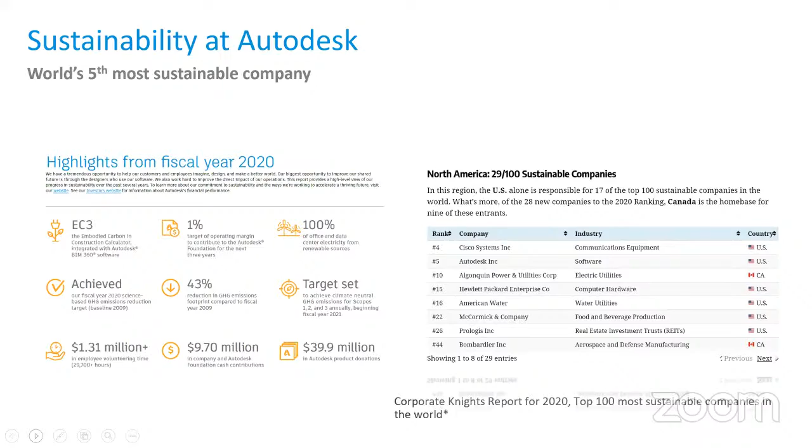Very specific to our solutions, while we are looking at how we could streamline our own initiatives and lead by example, we're also being very proactive in creating more sustainable capabilities in our solutions.

Most of you are aware of AutoCAD as a primary platform for your design initiatives and requirements. But we are also known for Revit, for our BIM 360 solutions, and our generative design capabilities, both for the AEC and the design and manufacturing space.

In a similar way, these solutions are aligned to helping every customer of ours create high performance building designs, or adopt lean construction practices within their projects, or even take a step away from buildings and look at a larger neighborhood. Our solutions are also there to help our customers create more sustainable, resilient communities and smart, sustainable cities.

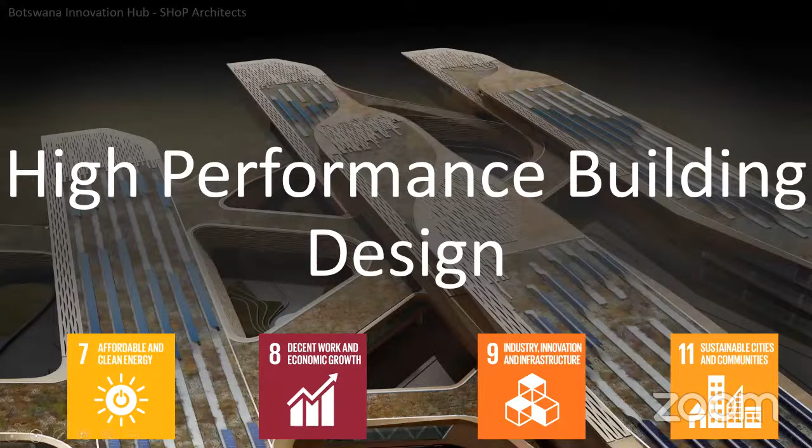Quickly, onto what we mean by high performance building design. I won't be going into the technicalities, as Ms. Millie and Ashish have already shared that quite explicitly. So I'll just give you an overview of how Autodesk, or technology as a vital tool, can help architects and designers create or analyze building performance.

Basically, we are looking at passive design strategies, how we can integrate renewable energy sources within our strategies, and how we can optimize building systems. Very importantly, I believe somebody asked a question in the chat: when looking at energy strategies, how important are material choices?

It's as important—energy and material choices would go together, and perhaps Ms. Millie would be better equipped to handle that question.

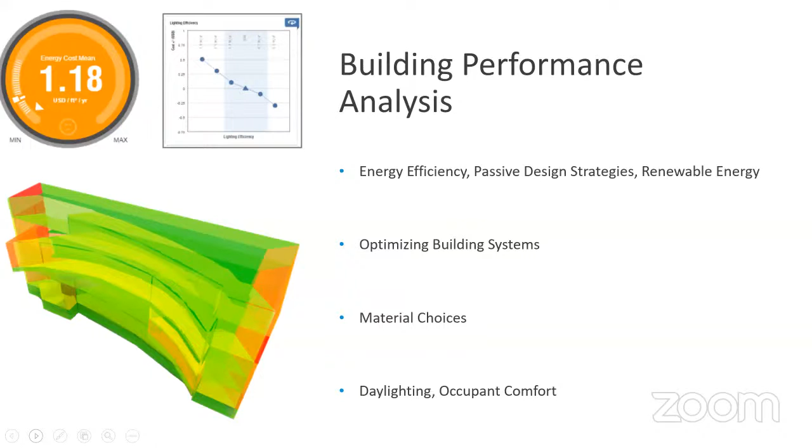When you're looking at these solutions, you need a technology solution that helps you analyze your entire design strategy holistically, not independently in isolation, but as a whole system. This gives you a systems approach, a systems orientation, and an entire building analysis together, mapping against standards such as LEED, AIA 2030, or ASHRAE.

It will help you analyze solutions with like-for-like format before you start putting up your building. When you're at a barren land exploring design options, FormIt, Revit, and Insight are your tools to put together your whole building and energy analysis, your detailed design analysis, looking at cost comparison and performance information across your design options.

So while your system is at its job giving you the design options, you as a designer, with your deep thinking and expertise, would be doing what you are required to do—pick the right option for your client.

A step forward, without going into detail, facade and HVAC systems play a vital role in your entire energy footprint. Here again, tools such as Revit, Insight, and even CFD help you first create the entire model.

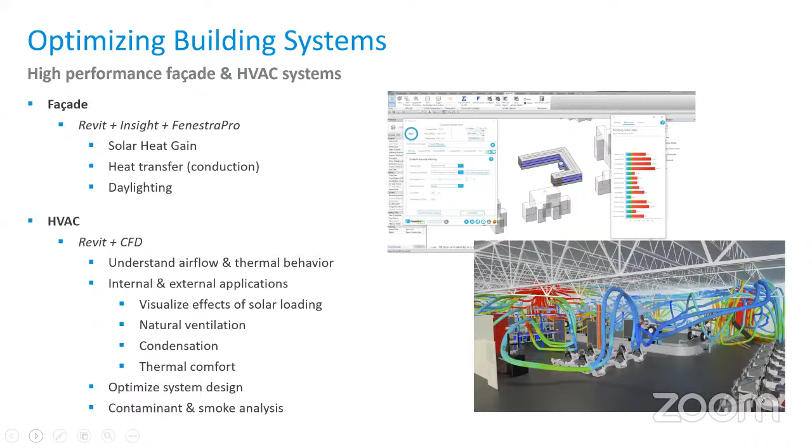Or even when it comes to safety, how do you optimize your system design, and how can you carry out a contaminant and smoke analysis within your building design as such.

While energy is one aspect, material choices are also a critical factor. So embedded within these tools is also a whole range of materials that you can play around with to check how each material choice will impact your energy footprint.

DPS, which is a global customer of ours, we've engaged with them a couple of years ago. We've impressed upon them how these technologies, early stage analysis and simulation, would help them analyze or create better design options for themselves, and they were happy with the result.

They were looking at 48% energy savings over their baseline, and that created huge savings for them—almost 2.5 million USD—with net zero.

Like DPS, we have other customers in India and also globally that we are working with, allowing them to do early stage design analysis, conceptualize, include simulation analytics at a conceptual stage to come out with the right design outcome.

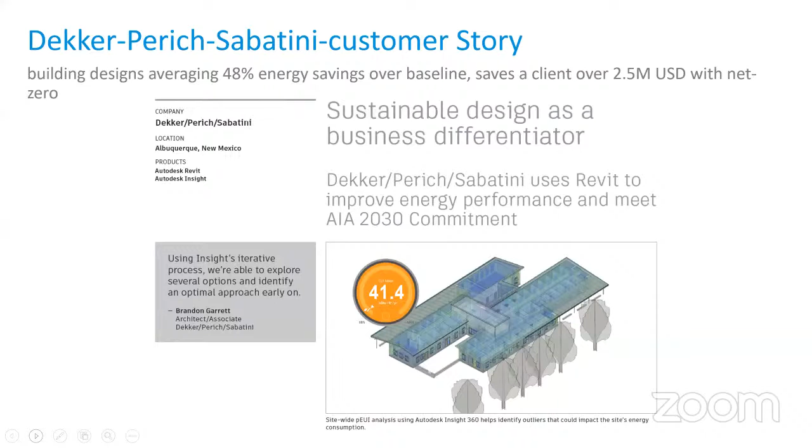Moving on to healthy buildings—yes, again we are looking at heat gain trade-offs and daylighting.

We have solutions such as Revit and FenestraPro with CFD, which will help you analyze, quantify, or balance trade-offs, or even room airflow analysis, ultimately looking at what is the best thermal comfort assessment you can embark upon, and the best thermal outcome you can give for your residents.

I'm going to swiftly go through this, respecting the time frame that we have.

When you're looking at CFD, it basically looks at your primary modeling, which looks at internal obstructions. At the second step, it looks at your air volume analysis, creating the external air volume combined with internal and external flow factors, then simulates and creates a mesh, runs a simulation, and gives you the best performance based on the parameters you've fed in.

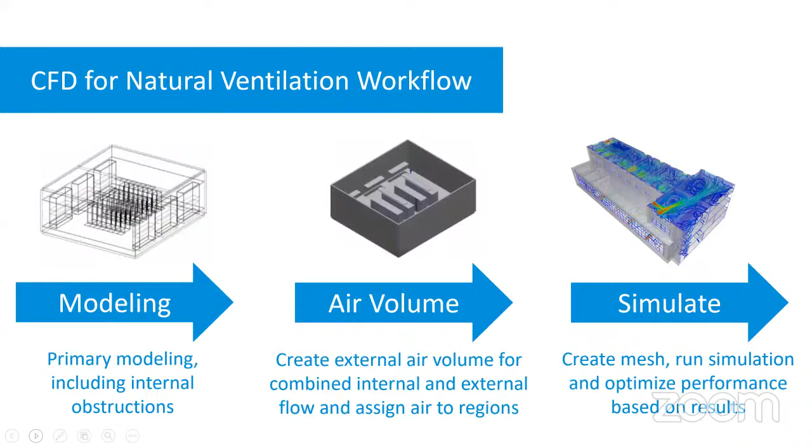Here's a case study: the Botanical Institute of the university campus. This building was as old as 1935, and over the years it got renovated. What they realized is they started losing the natural ventilation the building had, and soon the comfort and airflow dynamics within the building were lost.

So what we've done is help them scan the building and bring it onto the BIM model, then run the CFD simulation for them, which gave them options to renovate the building for better natural ventilation and daylighting, bringing it back into their building.

Moving from design, I would now step into the whole lean construction space.

What are the principles of lean construction, directly aligning to the UN SDG goals of industry innovation and infrastructure, and responsible consumption and production.

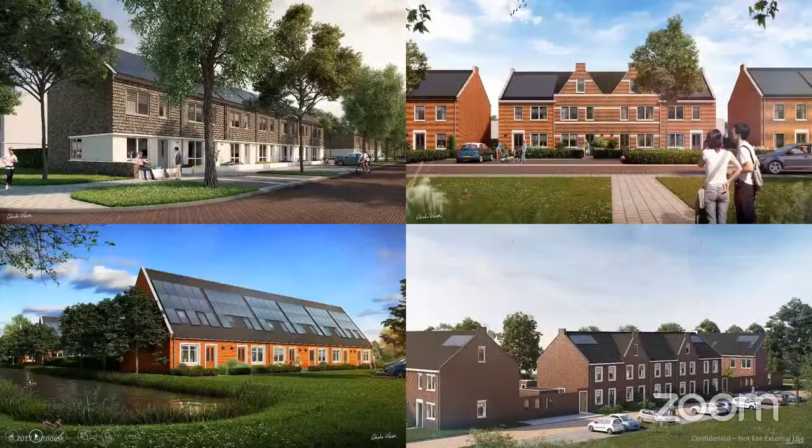Here's an example of a Dutch company, Van Wijnen, which is into the space of creating standalone sustainable houses. Each of these buildings are off the grid. They are self-reliant and standing in their own space.

We have invited them to the Autodesk University, where they attended a couple of training sessions on our solutions. What they have done is use prefab or modular construction principles and lean practices, and recreated their entire building model or construction process.

So what ideally used to take a few months to weeks, they were able to manufacture the various parts of the house, bring it to the site, and put it all together within a 3 day span. Imagine the amount of rework they were able to save, and the amount of material pilferage they were able to control.

Sustainability doesn't feature just in terms of the best designs out there, but also simply means how much savings in terms of energy, material, all boiling down to the finance or the costs you're able to save for the project. That's also quite sustainable.

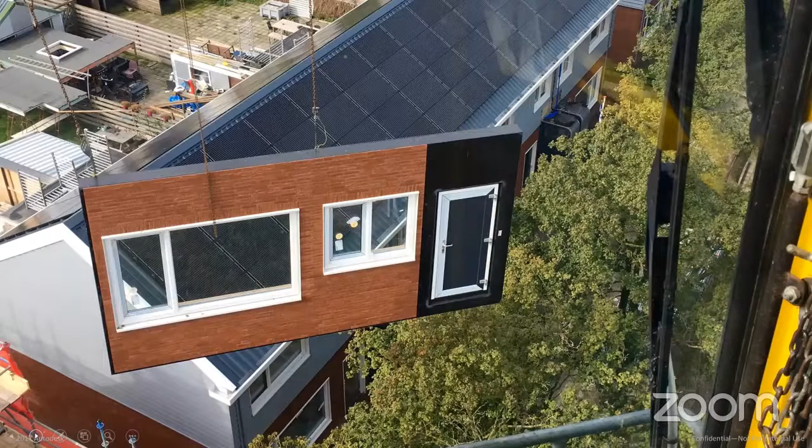Just a bit on the principles of lean construction. We're looking at the ultimate result to minimize waste and of course maximize efficiency.

What about the pre-construction phase? How well can you collaborate? When you have multiple stakeholders, how can you bring them all together on the same platform? How can you coordinate with them better, streamline logistics and your scheduling process?

And on site, how can you avoid risks? And very importantly, how can you avoid rework and reduce waste, and manage risk? With industrialized construction, you're talking about more lean production, productivity, and improving the efficiency aspect.

Tata Realty was one example we worked with in recent times, where they had this huge ambitious project in Gurgaon. While discussing with them, we talked about how they were looking at adopting lean construction principles.

When we started working with them early on, they were able to see that they could save almost 30% of their costs in the construction project simply by addressing minimal waste, removing waste, and better coordination.

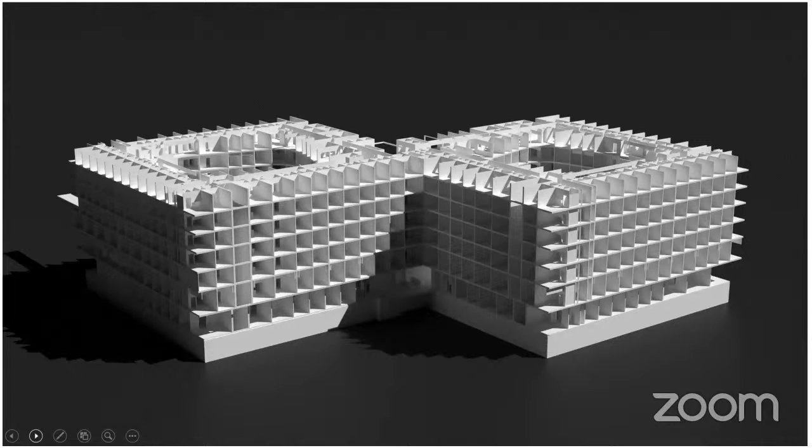At the end, I want to leave you with this video, an example of a hospital by the Nordic Office of Architecture. What they have done is create a BIM model of a hospital where there are unique aspects of the design that need to be constructed and plug and play, but there are also similarities in that each room in the hospital is similar to one another.

Imagine looking at this as a Lego play. We just plug and play each of the common systems, and wherever there is a unique factor, we manufacture it and bring it to the site and fit it there.

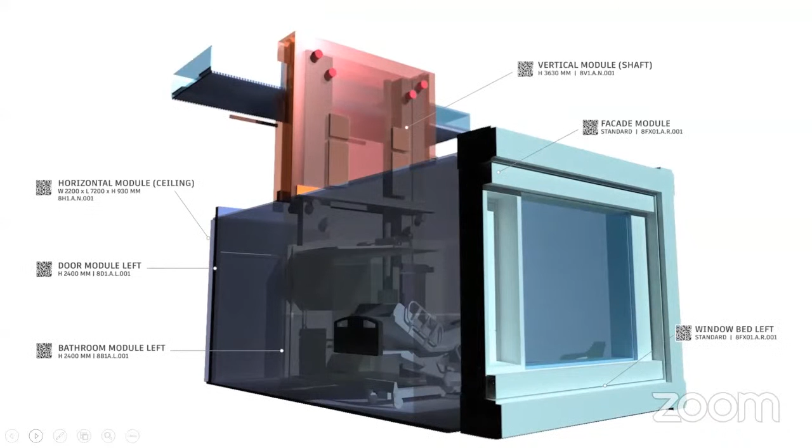Generative design is also a concept that would help remove the redundancy of the sketch work, the manual work required out of designers and architects, while the machine - a combination of the human mind and machine learning - helps you choose from different options.

So where the human mind and its imagination ends, the machine picks it up from there, stretches the imagination based on the parameters we feed in, and helps us pick the right option that fits not just into your business, but also your sustainable outcome.

At the end of the day, this is something I want to leave you with: yes, the idea is to create a better world, but in order to do that, technology as a tool, as a solution, plays a vital role. It's also a way for us to do what we are best at with our deep thinking and expertise, but let the machines help us be better at our own jobs. Thank you so much.